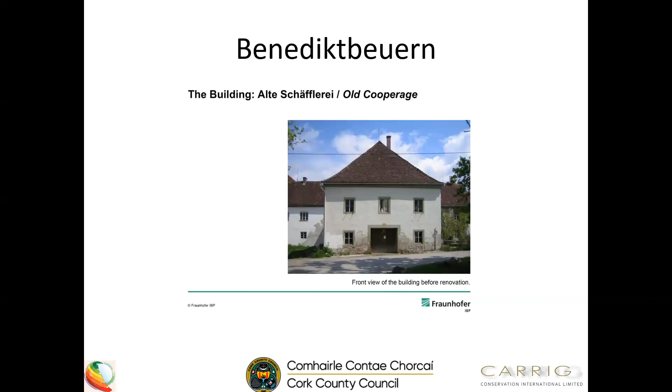This is it before, and you can see the lime render was pretty shot. We measured it at about 40 to 42 millimeters thick. So we took it all off the building, and we decided to put back a number of test products. The one on the right, can you see that? Yeah. This one we did in just an ordinary 40 to 42 mil lime render, NHL, natural hydraulic lime. This one we did with lime mixed with cork. And this one we did lime mixed with hemp.

This one we did lime mixed with a product called aerogel, which was designed by NASA for protecting the ships coming back from space. And we can tell you that the pure lime one actually improved the U value of this wall by 10%. The cork and the hemp are very close, 33 to 35% improvement. And then the aerogel was phenomenal, 75% improvement just at 40.

Now it's still expensive, but the company that makes it, called Cabot, is in America, and they've set up a small plant in Germany to manufacture this for the construction industry. The analogy I give is when I bought my first mobile phone in 1987, it cost me £3,500 or something, and it was a briefcase, and you had to go to a mountain to get service. Now you can buy them for nothing.

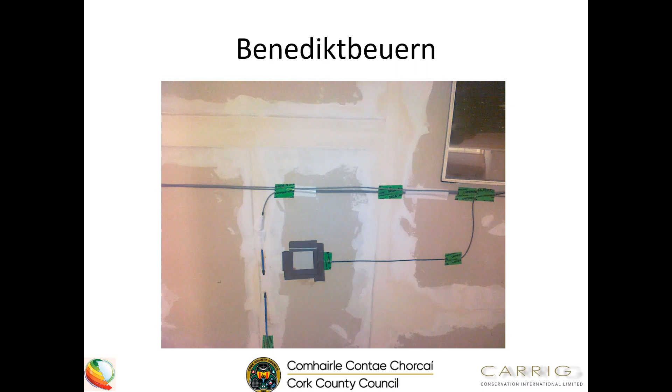the internal. And again, we looked at different products instead of using plasterboard, which is a gypsum product which doesn't allow moisture movement. This is a calcium board, which is made from lime, and it does allow moisture movement. And again, these are some of the control widgets that we have on there to tell us how it's performing and the kind of humidity, but also the big black square one is the U value test, and we constantly check that.

Then internally, we have all sorts of things hanging out of everything to get relative humidity, air change, everything else. And this is something that's now growing in Europe. We've got one in Ireland now in Limerick, a live laboratory. Because it's giving us hard data and actual data, this is what's going to drive and give us the ammunition to go and talk to people and say, well, if you do this, you're going to gain that.

And we are finding within the property market in Europe that there's now a premium for, say, B-rated or A-rated accommodation, whether it's office or dwellings. We're even playing with aerogel because it's such a fine product with paint coatings. If that works, a simple 5mm paint coating on the interior of a heritage building will improve the U value by up to, we think, 50% or thereabouts.

Now, the other thing that we find, and it's slightly different here because you've got a lot of timber buildings, but certainly in solid masonry buildings, we invested in equipment and we're measuring the actual U value. Again, I don't know enough about here. We have a thing called BER, which is Building Energy Rating, or in the UK, sorry if there's any British here, but they like to call it different,

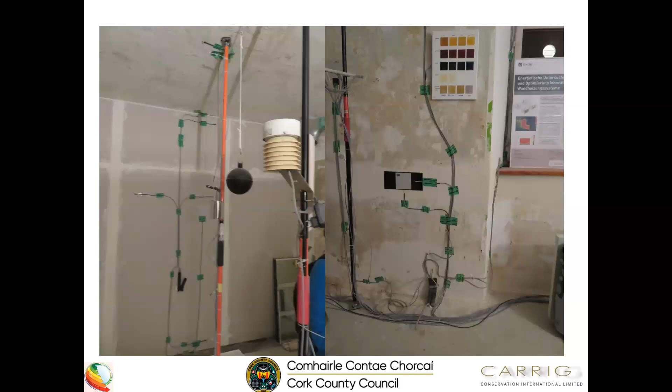and it's energy performance certificates, EPCs. Same system. It's a tick box system, but they designed it for post-1974 buildings, and therefore they give anything that's solid masonry a default, and they give the default at 2.2 U value, which is just stupid. We've measured a lot of walls that come anything from 0.8 to 1.3. So if you're taking the default as a calculation, you're then putting on 300 mil insulation in order to meet the target, but you don't need it. Think of all that carbon and the damage done to the building. So this is a phenomenal exercise.

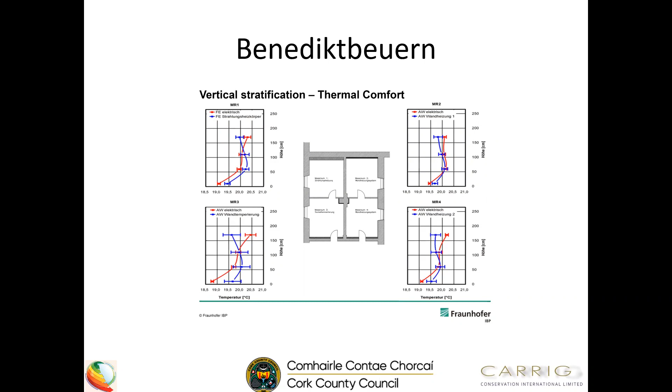Thermal comfort obviously is where we want to get to, but also the moisture movement within buildings, that's really important. And we found a lot of the early retrofits in Europe have been using modern products such as polyurethane, polystyrene, and they are moisture closed. They don't have moisture movement, and therefore it entraps moisture and causes decay to the historic masonry, but you don't see it because it's behind it. And it'll be in 50 years' time when they take something down and find that the building falls down as well. So that's really important.

That's a brick building built in 1698, and it's been in continuous residential use ever since. It houses mostly visiting professors, visiting lecturers, but also emeritus professors. We're converting it now into more individual units where it will still house emeritus professors, visiting professors and lecturers, but a third of it is going to be student accommodation. And we expect a big bump, because it's absolutely beautiful.

That red brick is 420 mil thick, and we did a physical U value test on that, and it came out at 0.83, so we didn't need to put insulation on, and that was a major saving. The roof was pretty shot, it was there a long time, and you could literally put your finger through the slate.

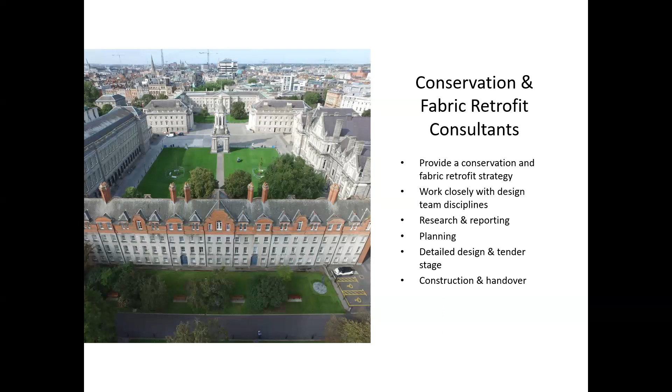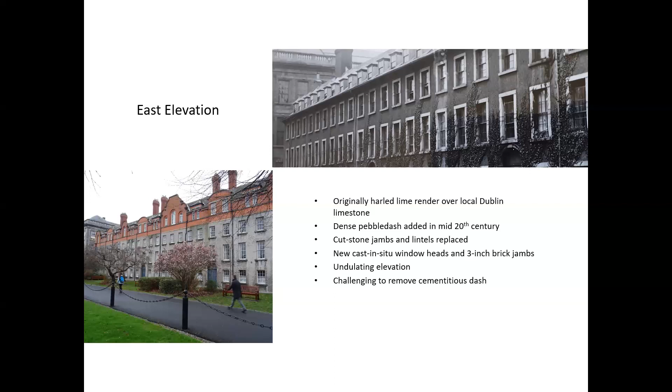That was the back of it. The photograph on the top right is a historic one, and we could tell from that it was a lime render that was harled, which is common over here, where it's thrown as opposed to floated, and it gives this nice rough texture. Well, yours would certainly know it. But in the 50s, on the bottom left, they took off the lime render and they put a very hard cement pebble dash, which was just woeful. But we managed to convince the client that we needed to take it off, and we did. And there's the rubble stone behind it.

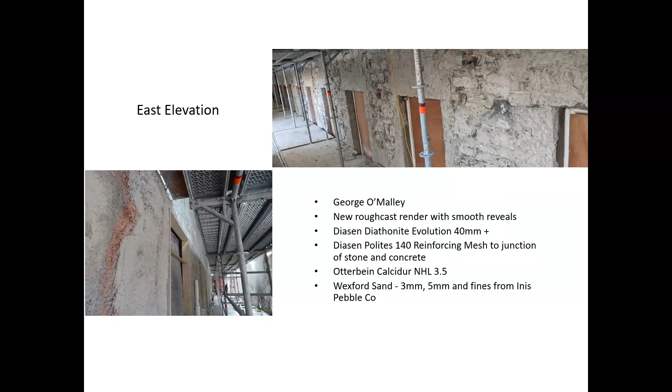And then on the bottom left, we started daubing out with lime and cork render. And that's it getting its second coat. It's an insulated render made by Diasen, which is an Italian company, but there is an Irish supplier of it. And then to get the original finish, we used just a natural NHL 3.5 as a dash coat to give it the rough finish.

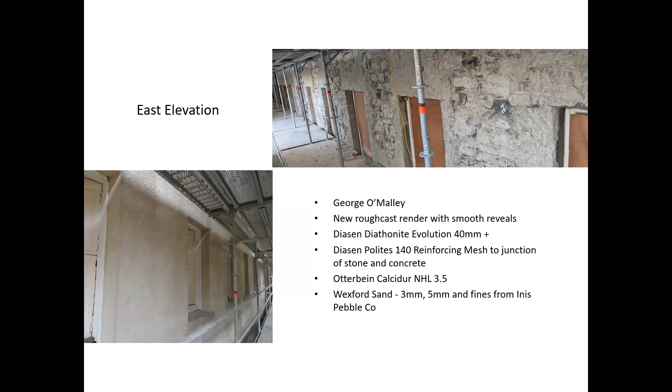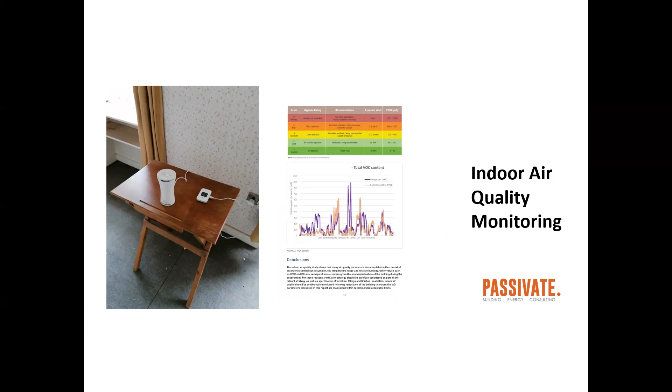So the sort of test that we like to do to give us the information, obviously, indoor air quality is important. So we measure it before we start and after we finish. So when I get back, we have a 2-week period from the client to go in and do follow-on testing before it becomes occupied.

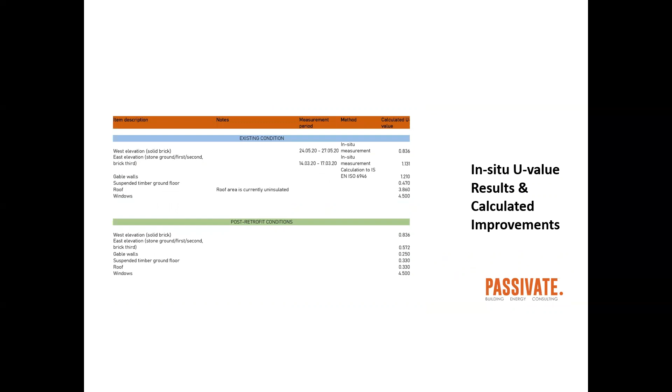But it's important information to have before we can make the decision, because as I say, if we took the BER standard, we'd be trying to fit 200, 300 mil insulation on. We didn't need it at all. We then do a lot of material testing.

This is a simple Karsten tube test, which is a calibrated plastic tube which we stick on with Blu Tack and fill up with water to 0, and then we time the water. So it's called an initial moisture uptake test, and that gives us the porosity of the brick, and it's non-destructive. So it's very easy to do, and as you can see from some of the samples there, we do them on the brick itself, but we also do it over the mortar joint. In this case, this is a mortar, so it's important to know the porosity.

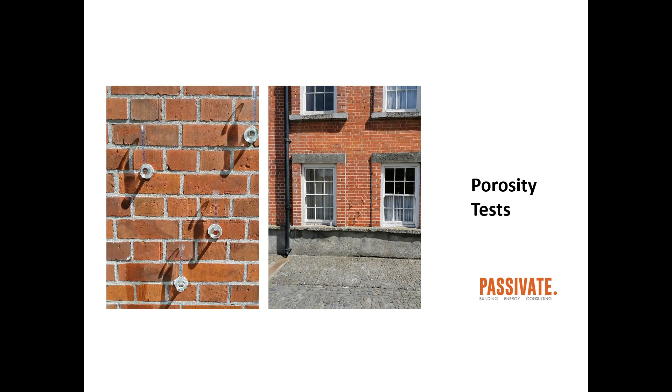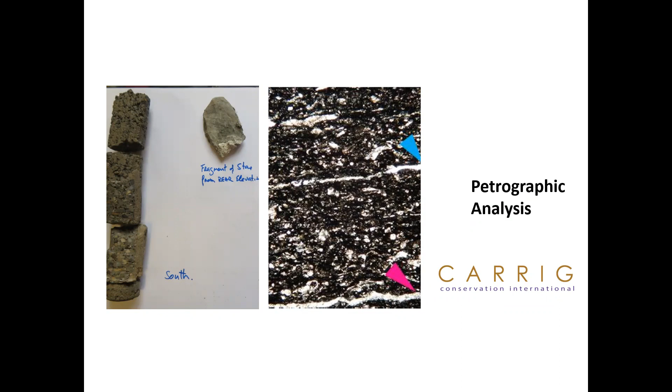We then, through our connections within Trinity, actually formed as a campus company in Trinity, and therefore we had almost faculty status, and we used the laboratories there. And in geology, we took a core sample of the back wall because we wanted to know the continuity of it, and we did petrographic analysis on it.

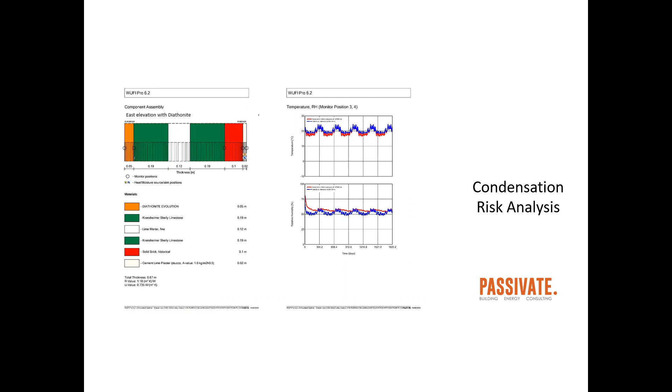And then condensation risk analysis. Sorry, these are all too small to read, but it'll be in the presentation that you can access later. But again, it's important to know, because if you do have a condensation risk, then you're likely to get mold growth and you're likely to get damage. And then thermal bridge analysis, the weak points of the building, where we would do all the physical testing. And we do it properly. We don't like using calculative software tools.

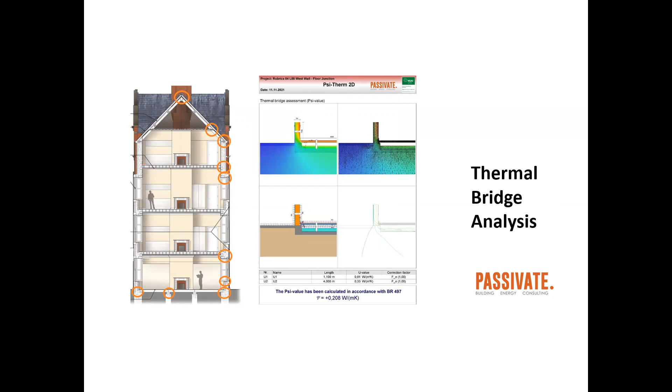So just to finish, some of the other research documents that we've had the pleasure to work on: as I said, we wrote the climate change adaptation plan. We've now been re-employed by the Irish government, because they don't have the resources to actually implement the first 5 stages of what we recommended, and that's doing a lot of community consultation, stakeholder consultation. It's really a fascinating part of the whole thing.

We wrote a document for Historic England called Understanding Carbon in the Built Environment. That was in 2020. That's actually published as well. And there we took a simple building, and I hope none of you watch Coronation Street, but it's that sort of a building. And we did a calculation on the carbon as it was. Obviously, it had an oil heater, so operational energy was going up, but the embodied carbon was well spent.

Then we did a light energy upgrade by just fixing windows, insulating roof and floor, and putting in a heat pump, which was pretty good. It was about a 5-year payback. We did a deep energy retrofit where we did put insulation into walls, and that turned out to be about a 15-year payback. And then we demolished the building virtually, built a new building with all new carbon-intensive products. It was going to take 63 years to pay back. So that's a good argument for adaptive reuse of our existing buildings.